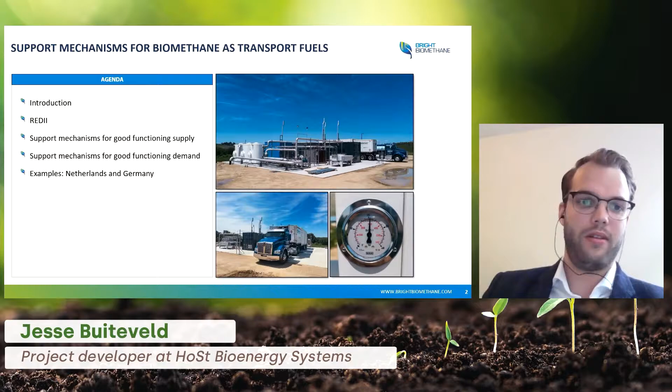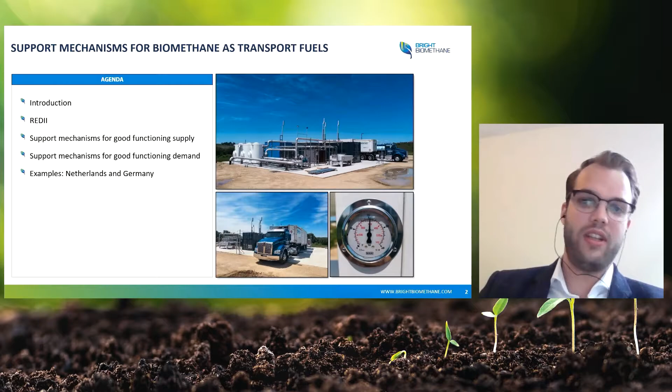I'll start by giving a general introduction. Then I want to discuss the Renewable Energy Directive. Our first speaker today, Penelope, also talked about our European goals with respect to sustainability, but I want to put a special focus on the transport sector. Next, I'll talk about support mechanisms for a good functioning supply, with a special focus on biomethane, then discuss support mechanisms for a good functioning demand, again focused on biomethane. Finally, I'll give two examples based on our own experience, for the Netherlands and for Germany.

Martins already gave an introduction to Bright Biomethane, so I'll try to keep this short. Bright is part of the HoSt group, and HoSt is one of the biggest builders of bioenergy installations worldwide. We build biogas digestion installations, gas upgrading installations, hence Bright, and also biomass combustion installations.

Besides being a builder of bioenergy installations, we're also an owner and operator of several bioenergy installations, nine in total in the Netherlands, where we yearly produce over 130 gigawatt hours of biomethane annually.

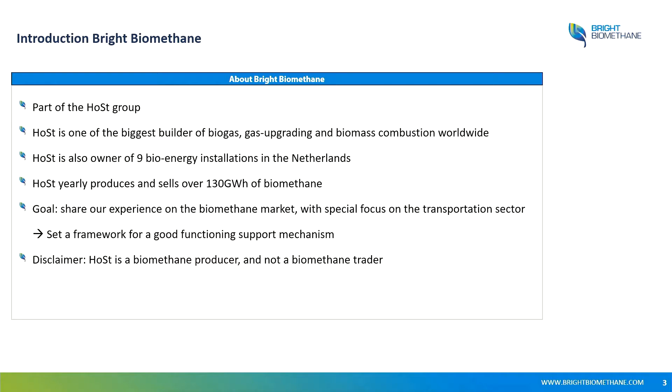My goal for today is to share our experience with the biomethane market, with a special focus on the transportation sector. What I'll try to do is set a framework for a good functioning support mechanism to support biomethane for the transportation sector. I'd also like to add a disclaimer that HoSt is a biomethane producer, not a trader, so everything I tell today is based on our own experience as a biomethane producer.

Talking about the importance of biofuels in the transportation sector: when looking in general at the transportation sector, this sector needs to be more sustainable. There are European goals, and we can basically see two trends. For cars and short distance transportation, we want to go for electrification, electric vehicles. However, electrification is not possible for heavy transport and also not for marine transport.

For heavy transport, we're moving to hydrogen and LNG. For marine fuels, we're more moving to LNG and methanol. Both LNG and methanol can be bio-LNG, biomethanol, or synthetic LNG and methanol derived from blue or green hydrogen.

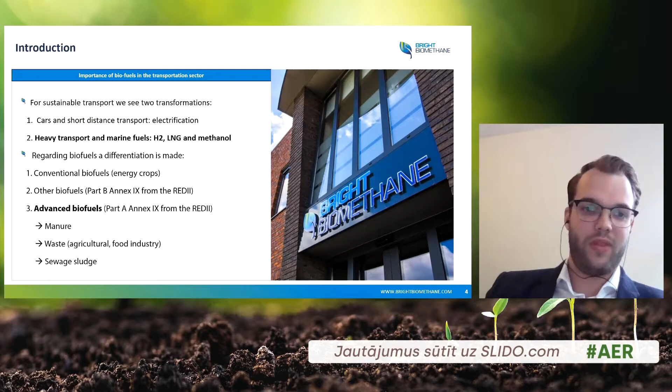Then we have the advanced biofuels, which is actually why we're here today. These are from Part A, Annex 9 of RED 2, and they are biofuels derived from waste, such as manure or other agricultural waste, waste from the food industry, but also, for example, sewage sludge.

If you take a closer look at the revised Renewable Energy Directive, the RED 2, we can see that there are clear goals stated. It states that in 2030, member states must require fuel suppliers to supply a minimum of 14% of the energy consumed for road and rail transport as renewable energy.

We can see that some countries in Europe are even more ambitious. For example, Germany set a goal to have 25% of the fuel mix as sustainable fuels.

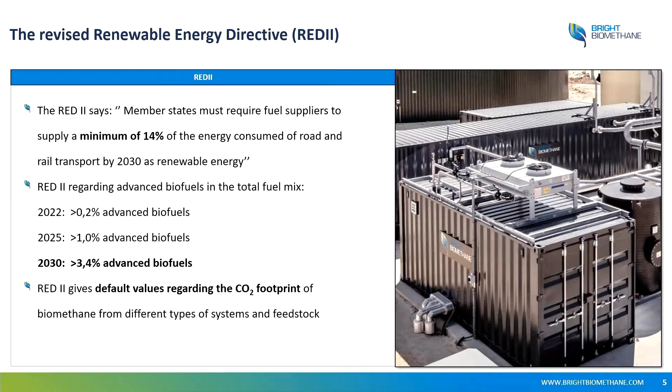When zooming in on this 14% demand, we can see there's also a differentiation in the type of biofuel. In 2022, only 0.2% of the total fuel mix should be derived from advanced biofuels, while in 2030 this should be 17 times more, so 3.4% of advanced biofuels derived from waste.

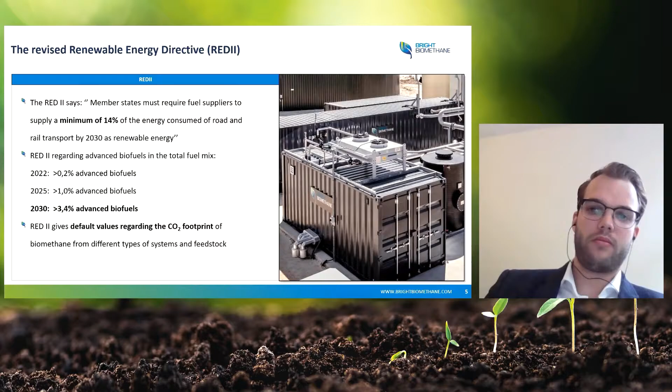What's also really nice is that the RED 2 gives default values for the CO2 footprint of different types of biofuels, derived from different types of systems and feedstock. That gives us a really good framework to work with.

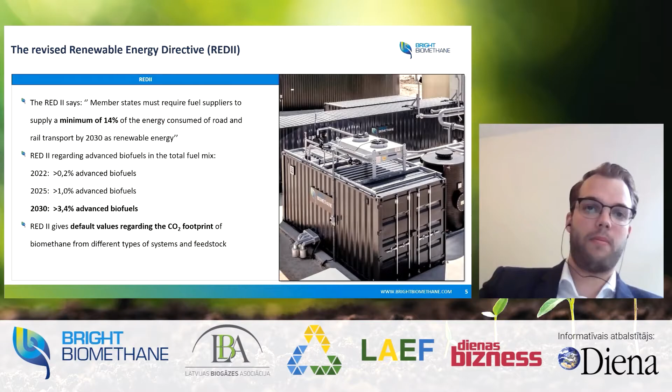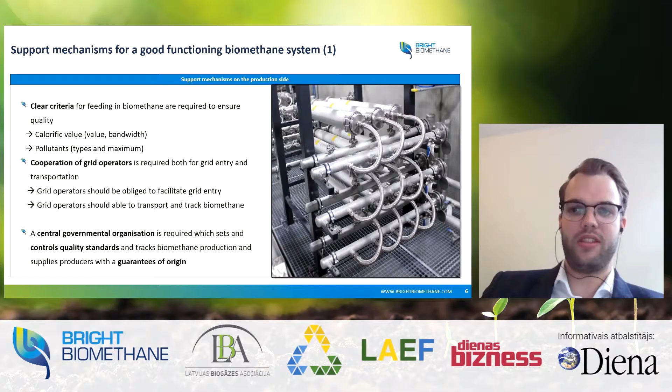When looking at the production side, we can see basically two things which are required for a biomethane producer to produce and sell biomethane, for example to the transportation sector. First of all is grid entry.

It's really important when producing biomethane that you can actually inject it into the national gas grid. Therefore we need clear criteria, for example based on calorific value. It needs to be a certain value, there can be a certain bandwidth, and the same goes for pollutants. Different types should be specified, with a maximum allowed in the biomethane.

This also requires cooperation of the grid operators. So first we need clear criteria, and then grid operators should facilitate the grid entry. They should be obliged. That doesn't mean they have to pay for it, but as a biomethane producer, you should have the possibility to feed into the grid.

Another important thing is that you need to track biomethane. So if you produce biomethane, you need some kind of certificate to prove that you have made this biomethane, that it's derived from sustainable biomass, and then that certificate is worth money.

In order to do so, we need a central governmental organization which first controls quality standards, and second gives the opportunity to track biomethane production. This can be done by supplying a certificate, a so-called guarantee of origin.

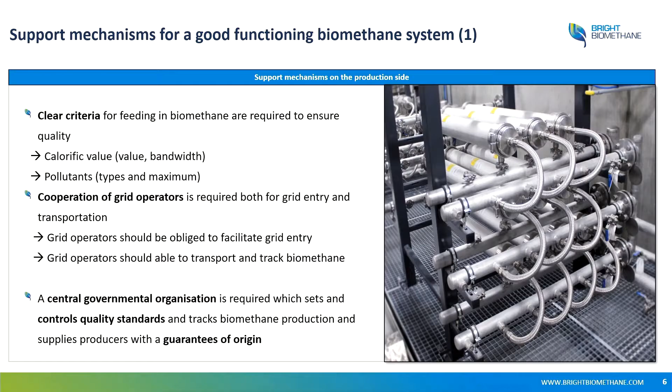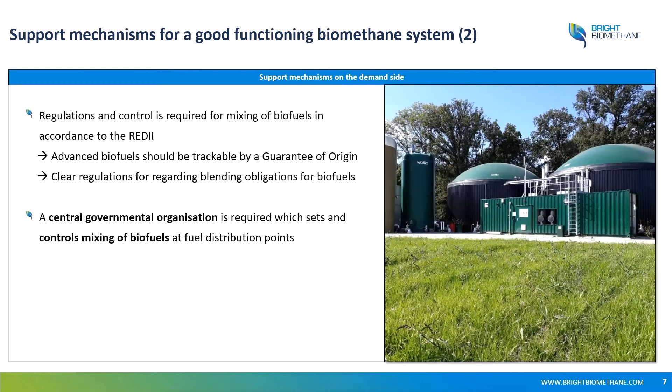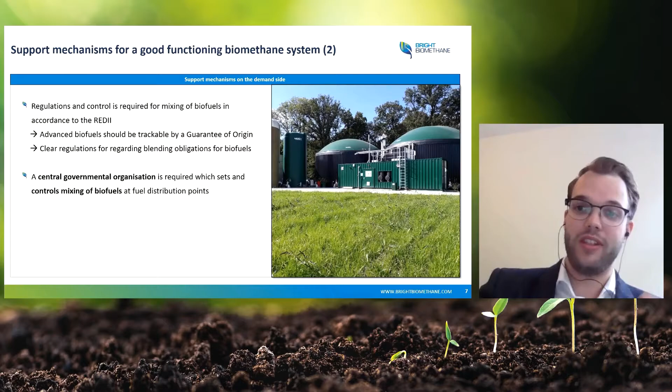When looking at the demand side, some support mechanisms need to be in place. There are clear regulations in the EU on mixing of biofuels, with set goals. But first, we need to make sure we can control this, or at least see if the fuel mix is actually 14% sustainable in 2030. This, once again, requires a guarantee of origin.

Second, clear regulations need to be in place for blending the biofuels. Therefore, we also need a central governmental organization which sets and controls the mixing of biofuels at fuel distribution points.

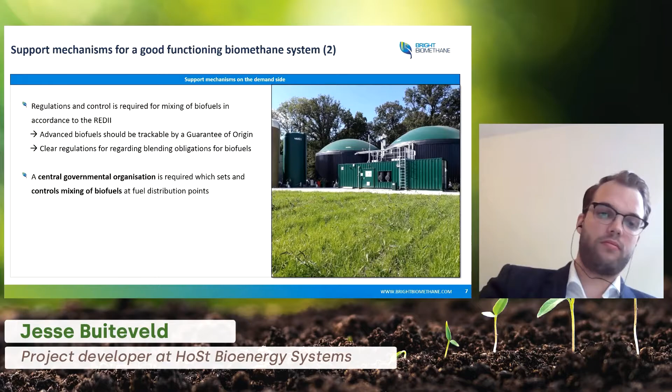Now what I want to share with you, from our own experience, are two examples. First, I want to focus on the Netherlands because that's where our main business is as a biomethane producer. In the Netherlands, grid operators have an obligation to supply grid entry. So when you build a biogas installation and say to the grid operators that you want to feed into the grid, they're obliged to facilitate that.

In the Netherlands, we have a central governmental organization called Vertogas that provides a system of guarantee of origin. On the other hand, we have the Dutch Emission Authority, the Nederlandse Emissieautoriteit or NEA, who controls the blending obligations for biofuels. So we have a system in place based on supply and demand, and that results in a certain value of biofuels.

What we see in the Netherlands, which I don't fully support, is that we have a certain threshold value. We say the produced biofuel should have a CO2 footprint below 20 grams of CO2 per megajoule, and then you're allowed to trade it as a renewable fuel unit, HBE, hernieuwbare brandstofeenheid.

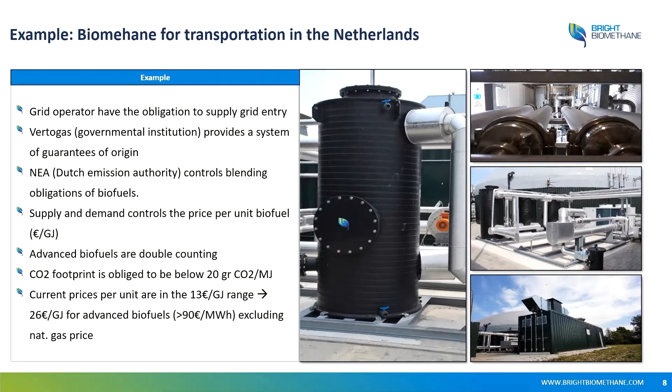When we look at the current prices in the Netherlands, you can see that if you're a biomethane producer, for example from manure or agricultural waste, the prices are in the range of 90 euros per megawatt hour because of the double counting. In fact, this is higher than the national feed-in tariff we have on biomethane.

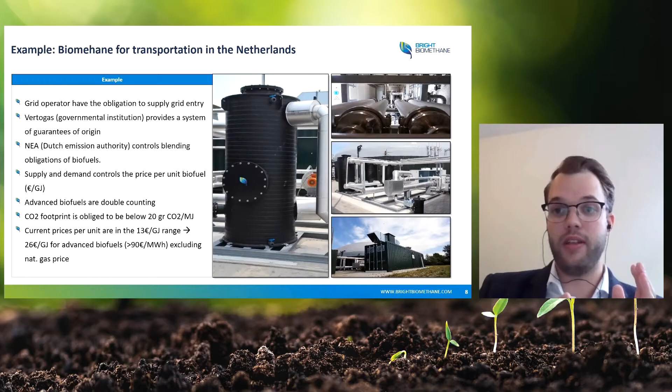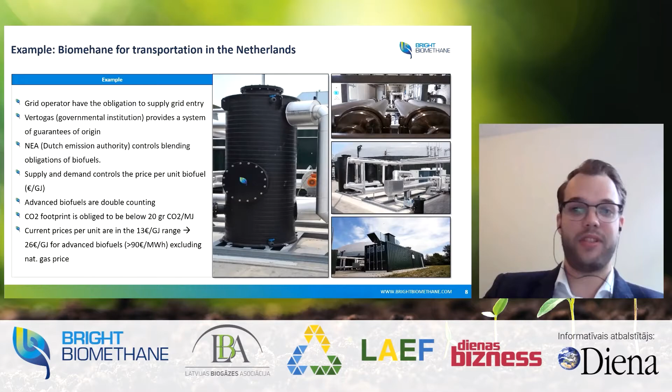So actually what we have done as a biomethane producer in the Netherlands is stop our feed-in tariff. We said to the government, okay, we don't want the subsidy anymore. That allowed us to trade the certificates to the transportation sector and earn more money, while the government also didn't have to pay the subsidies. So that's a really nice system.

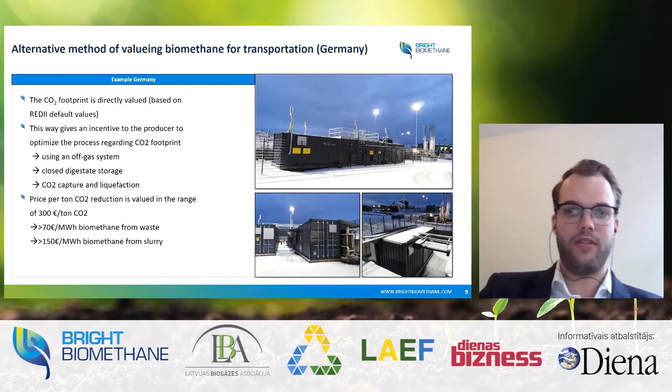But maybe an even better system, which is actually pretty similar to what we have in the Netherlands, is when we look at the German system. The only difference is that in Germany, the CO2 footprint of the biomethane is directly valued, and that's in accordance with the default values stated in the RED II.

This actually gives a really nice incentive to biomethane producers to be as sustainable as possible. For example, you can think of using an off-gas system to reduce methane slip in the gas upgrading, or having a closed digestate storage to prevent methane emissions, or having CO2 capture and liquefaction.

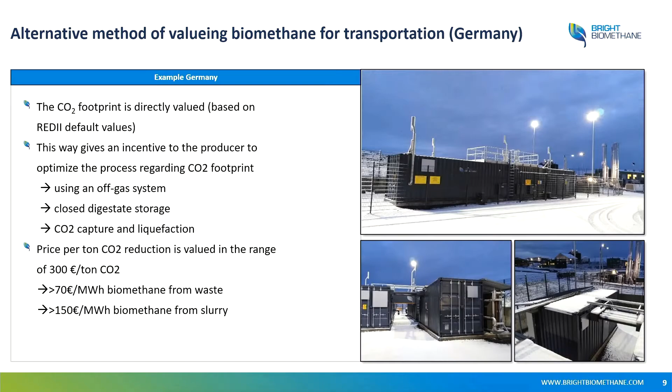This system results in the more sustainable producers of biomethane actually getting a higher price for the product. Prices in Germany were in the range of 300 euros per ton of CO2, based on the CO2 reduction in the fuel mix.

And in fact, nowadays we can see prices even as high as 400 euros per ton of CO2, resulting in prices for biomethane from waste higher than 70 euros per megawatt hour, while prices for biomethane derived from manure and slurries are even as high as 150 euros per megawatt hour.

So I think, to conclude, there are three important things to put in place. First, you need to facilitate grid entry. Second, you need to track the biomethane by a guarantee of origin. And third, on the mixing side of the fuels, you need an organization that controls that a certain amount of biofuel is mixed in the mix.

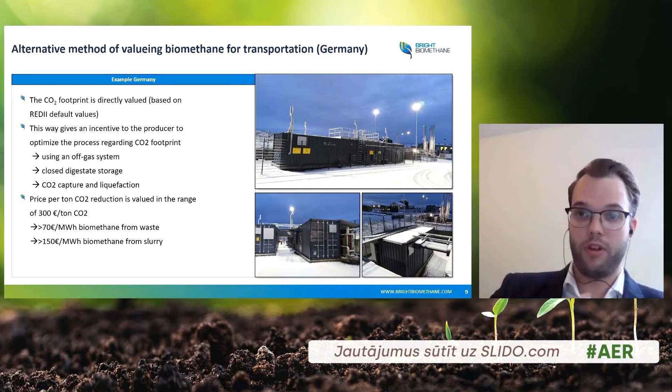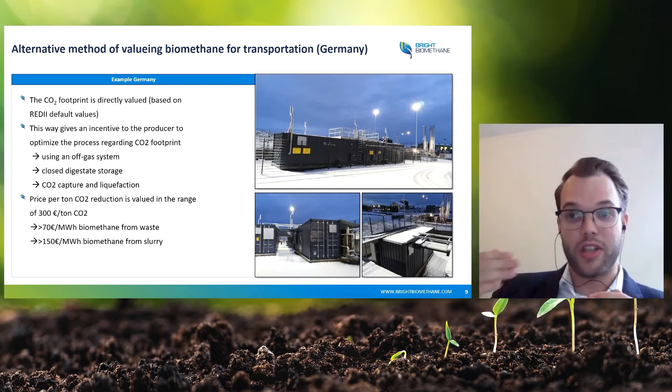When you have that in place, that allows you, as a country, to not actually need a feed-in tariff to support biomethane. If you just have the right instruments in play, you have demand and supply, which results in higher prices and higher revenues for biomethane producers than a feed-in tariff.